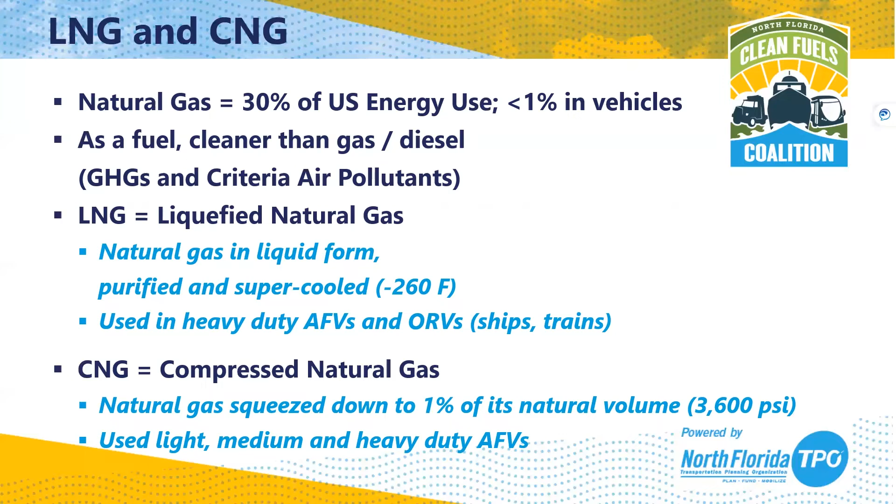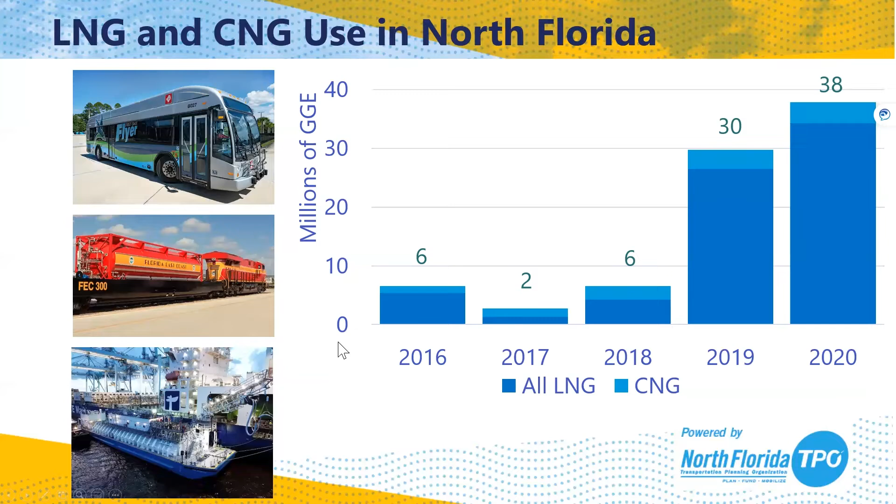Now that you have a sense of how significant the effort here in North Florida is regarding alternative fuels and what a big role natural gas plays in it, it's time to bring our experts into the conversation so you can learn about RNG and what its role might be here in North Florida and in South Florida in the future. We're going to start with Sam Lair, Manager of Sustainability and Markets Policy for the Coalition for Renewable Natural Gas. Sam is going to help us understand RNG from first principles, and then get into some of the policy questions that shape its role in the economy now and ways we can expect it to grow in importance going forward. Take it away, Sam.

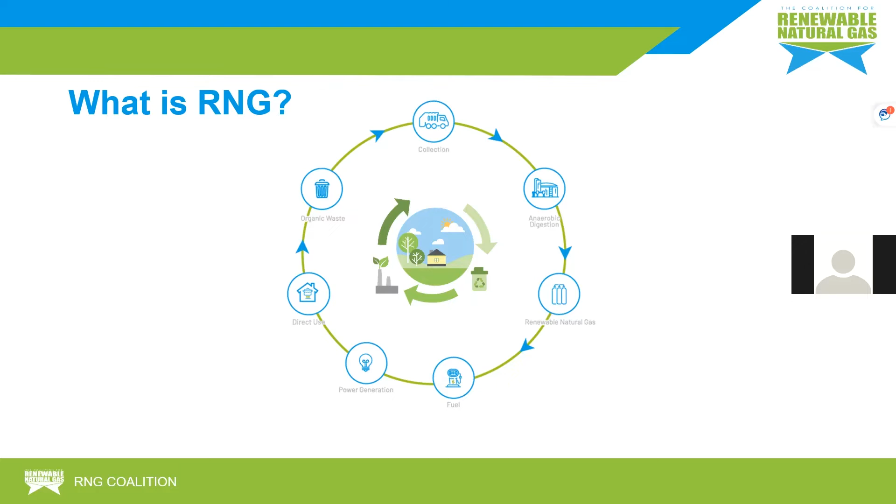One of the reasons why this is such a crucial time for our industry hinges on the need to shepherd in a new generation of waste management technologies, which from a climate standpoint will necessarily be focused on methane emissions. This year's IPCC report was very clear on this topic and included methane capture and recovery from solid waste management as an important strategy.

We've also seen explicit commitments from the UN to reduce methane, which in the US has taken the form of a methane regulation pending from EPA. That rule includes reducing leakage and venting from oil and gas operations, increasing landfill gas capture rate to 70%.

And rewarding emission reductions in the agricultural sector. So here's where we really see an opportunity for our industry to live up to its potential in abating methane emissions, a mantle we've been carrying for years.

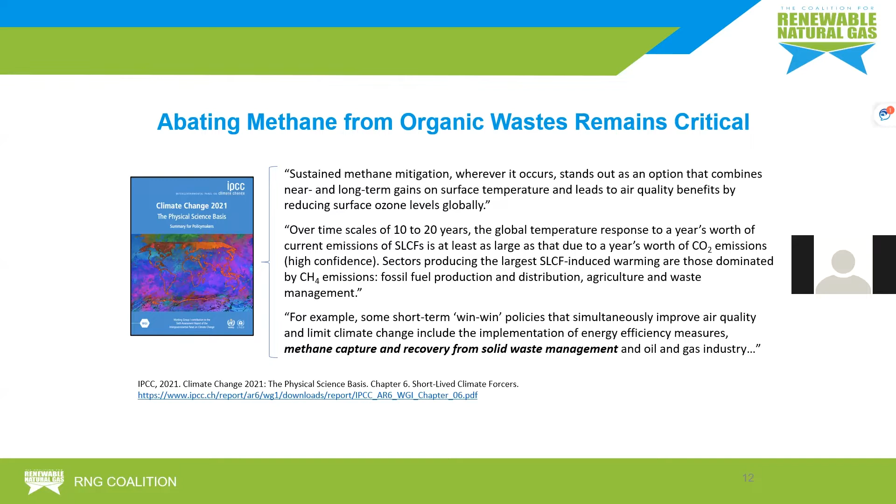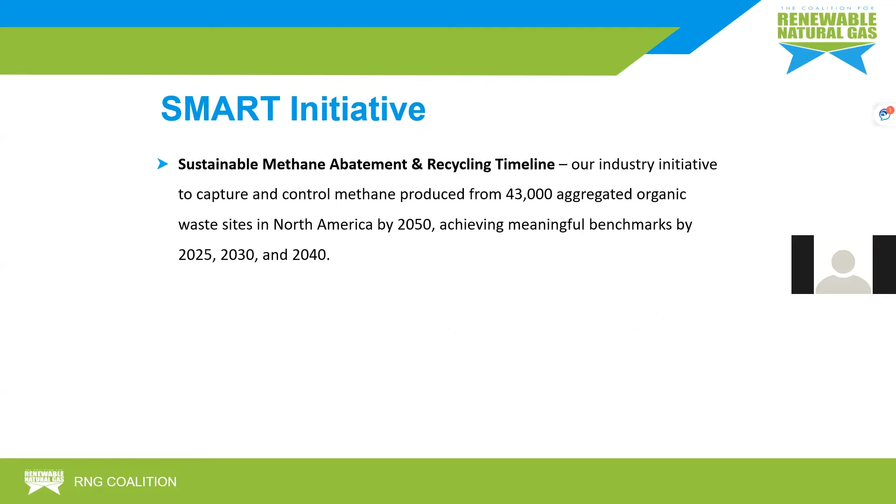Pursuant to that goal, and to the goal of realizing a sustainable profile for organic waste more broadly, including improving human health impacts and the circularization of our economy, RNG Coalition has established our Sustainable Methane Abatement and Recycling Timeline, or SMART initiative, in which we aim to capture and control the methane produced by all 43,000 aggregated organic waste sites in North America by 2050.

We're working to accomplish that with our more than 350 members throughout North America, advocating for the development and use of RNG, renewable hydrogen, and biogas to electricity produced from all sustainable feedstocks, created by all sustainable and competing technologies, and for all sustainable end-use applications.

So we really try to take a broad, technology agnostic approach to promoting RNG and the associated energy sources we can produce from that. Formed in 2011, our focus has historically been on the use of AD to produce RNG, with our work expanding to encompass those other technologies.

Broadly speaking, we know there's significant value in the use of biologically derived feedstocks across sectors. This includes the use of RNG, and increasingly electricity and renewable hydrogen, as a transportation fuel for corporate, industrial, clean energy buyers and utilities alike.

Given that bioenergy provides the only pathway to carbon negative energy, especially when dealing in methane mitigation and in tandem with carbon capture and storage technologies, which are growing, our industry presents a unique value proposition, which will allow us to really enable negative emissions in the long run.

We've seen significant interaction within the AD, the anaerobic digestion industry, between these types of partners. For example, those who are concerned with the carbon footprint of their food waste, seeking anaerobic digestion to RNG as a solution, and pairing that with energy needs in the transportation sector, which is why we're here today. That really extends to any number of feedstock, energy carrier, and end use applications you can imagine.

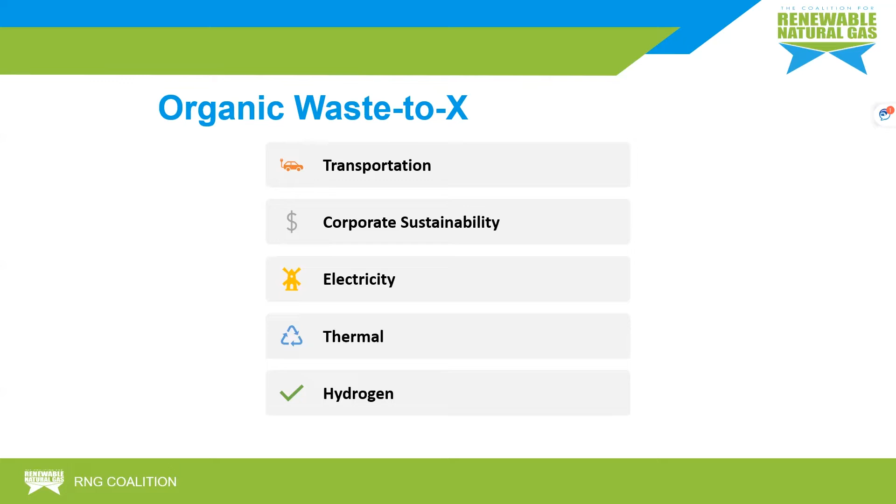For the purpose of today's meeting, we'll be focusing on the transportation sector. I think it's important to begin that conversation with a discussion of the broader environmental and human health goals in the transportation sector. Importantly, when it comes to near zero natural gas vehicles, we're able to achieve...

A 90% reduction in NOx and a 99% reduction in SOx compared to diesel with the use of a low emission, near zero emission natural gas vehicle. This is significant because, in tandem with reducing greenhouse gas emissions, criteria pollutants also have an effect on human health. So this technology means that RNG fueled NGVs have an important role to play in the transition to cleaner vehicles.

Especially in the heavy duty sector, given that zero emission technologies in these sectors, and the infrastructure needed to fuel them, are still largely unavailable.

When it comes to greenhouse gas reduction through RNG, there are two ways to assess the carbon intensity of the fuel: either on a life cycle basis or at the point of combustion. At the point of combustion, RNG is essentially carbon neutral, with the exception of the greenhouse gas effects from a small amount of criteria pollutants, which are generally rounded down to zero.

So here it's important to understand that the CO2 emitted during the combustion of RNG is carbon neutral, because it's biogenic, meaning it came from plants instead of underground, and therefore does not add additional carbon to the atmosphere. I think that's a foundational fact about biofuels, and especially RNG, since it's derived from waste. That's a good point to keep in mind when thinking about the greenhouse gas emissions from these technologies.

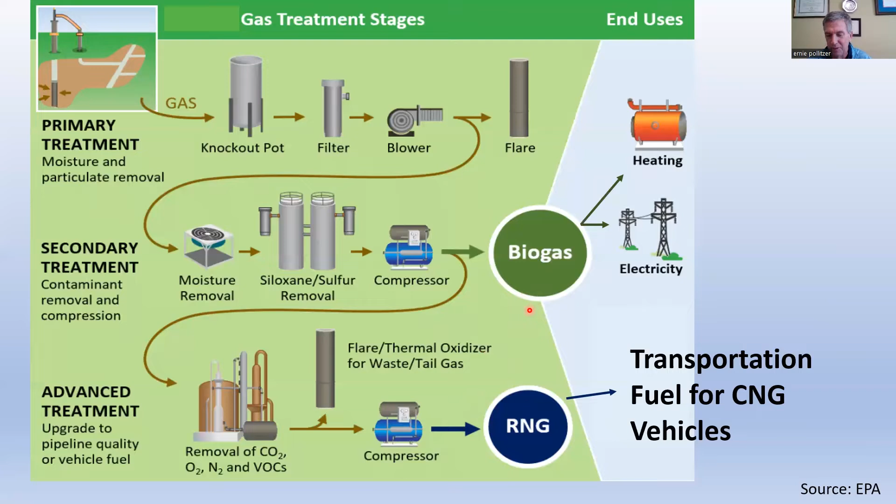Okay, so let's go through the EPA RFS program. I realize Sam talked about it, but let me go through it here. The Renewable Fuel Standard Program was passed by Congress in 2007 to produce and blend renewable fuels into the U.S. transportation fuel market. The way they do that is there's an annual renewable volume obligation, a policy that sets the volumes for the different fuel codes in the RFS program.

And the overall volume is 20.77 billion gallons of fuel, with the vast majority of that being for ethanol. In comparison, the RNG volume is only 0.77 billion gallons, so that's less than 5% of the total.

Now, the RIN that you've heard about actually is an acronym, and it stands for Renewable Identification Number. It's a unique number assigned to each gallon of RNG that's produced, and it's the environmental credit or attribute to the fuel. To give you some feel for the different values of the RINs, the RNG fuel code has the highest value RIN—it's over 2 times the value of other renewable fuel codes like biodiesel. That's one of the reasons for the interest in RNG and the growth in the industry: the higher value RIN for this fuel.

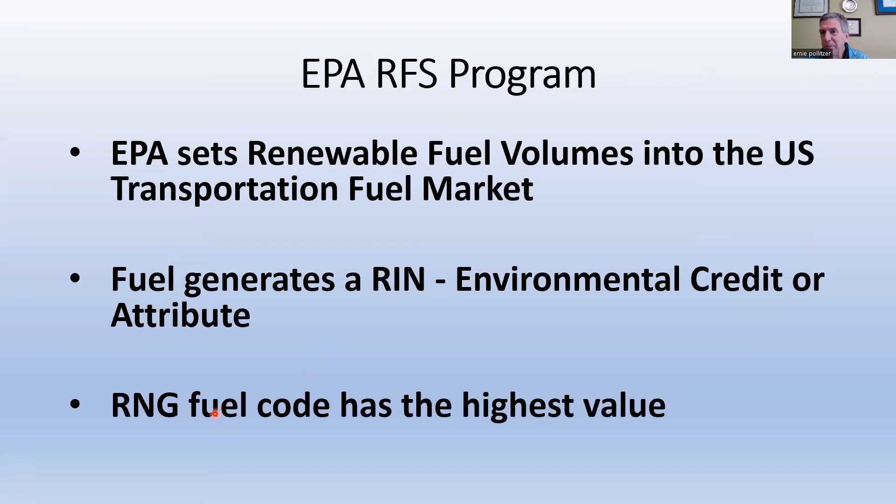So that's a quick overview of RFS. Now I'm going to go into this mapping pathway that I had in my agenda. This is the slide I'll be using for the rest of the presentation.

Now, these first 3 boxes have already been touched on with earlier slides. We kind of talked about feedstock providers like landfills, wastewater treatment plants, and agricultural farms, and they all generate this biogas from their feedstocks. Then you have the advanced gas treatment that can make the RNG fuel product.

Now at this point, there are 2 options for this fuel. You can have the RNG injected into a pipeline, or you can sell it locally. The more prevalent is the RNG pipeline injection, but not the only option. At many facilities, especially at landfills, the trash haulers have CNG trucks, and they will buy that fuel right there at the landfill and the gas treatment facility.

I've also included on this slide some information about renewable natural gas and the difference between that and regular natural gas. Renewable natural gas is 96 to 98% methane—this is the chemical formula for methane—and about 1 to 3% CO2. So you can see how this gas treatment system has taken that raw biogas, which was 35 to 40% CO2, and reduced it down to a very low amount.

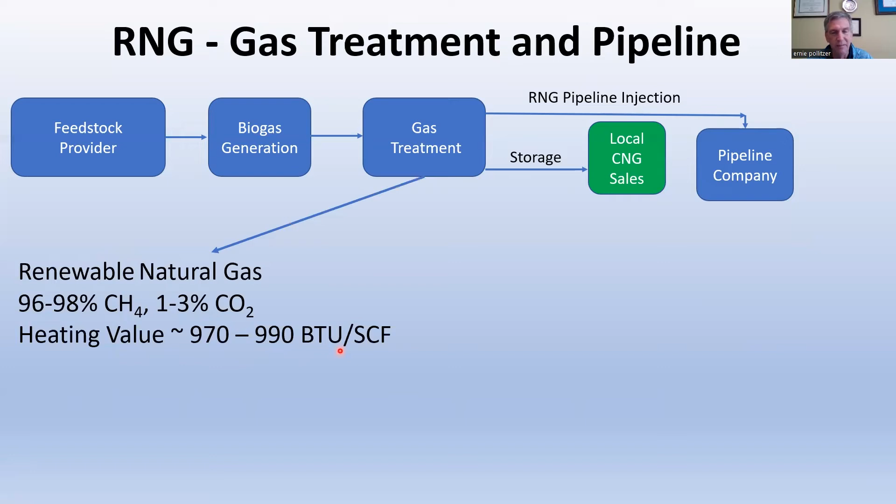The heating value is about 970 to 990 BTUs per standard cubic foot. Compare that to regular pipeline natural gas, which is typically 85 to 90% methane, less than 1% CO2, but the heating value is over 1,000. So if anybody's curious about how pipeline natural gas can have a lower methane content but a higher heating value, feel free to ask your question in the chat.

Now, looking at these two gases, you may not think there are big differences between them, but for the pipeline companies, these are big differences, and they are very strict on the gas quality for renewable natural gas. They have analyzers on these pipelines connecting into them, analyzing for parameters like methane and CO2, along with others like nitrogen, oxygen, water, and hydrogen sulfide. They are very strict on the quality of the renewable natural gas that goes into their pipeline.

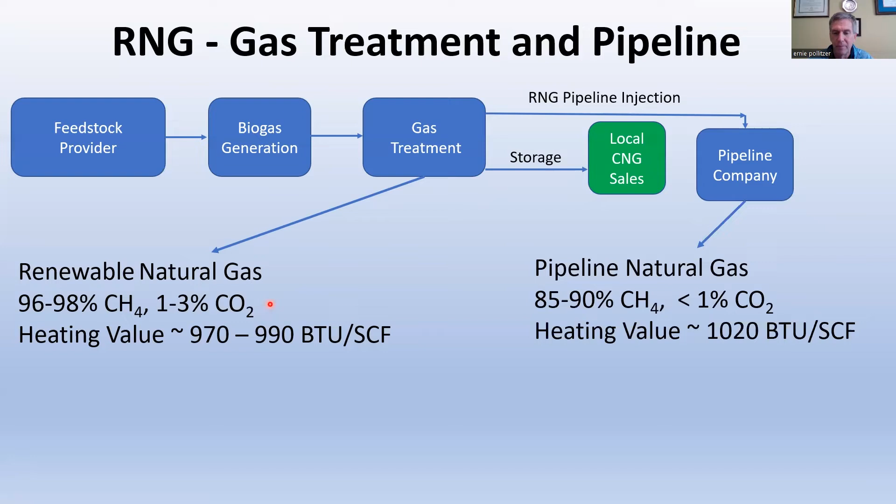So we'll move on to this next slide, which shows the next steps of the contractual selling of the renewable natural gas to CNG end users down here. Again, it could be either this local CNG sales or the CNG user down here. Now, one of the reasons pipeline injection is more prevalent is because of what's called equivalency.

That is because RNG can be injected into the pipeline at one point right near the gas treatment facility, and then an equivalent volume is sold from another pipeline anywhere in the US. So that makes a big difference. This allows the RNG buyers to be buying gas from anywhere in the US.

What's not shown on this slide is the additional environmental credit associated with RNG if this RNG is sold into California, Oregon, and soon Washington. While it's not shown, these state programs have a big impact on the overall RNG market.

So when you're buying RNG from a pipeline, what you're really buying is this RIN credit here, the environmental attribute associated with the fuel. You're not actually buying the RNG fuel itself.

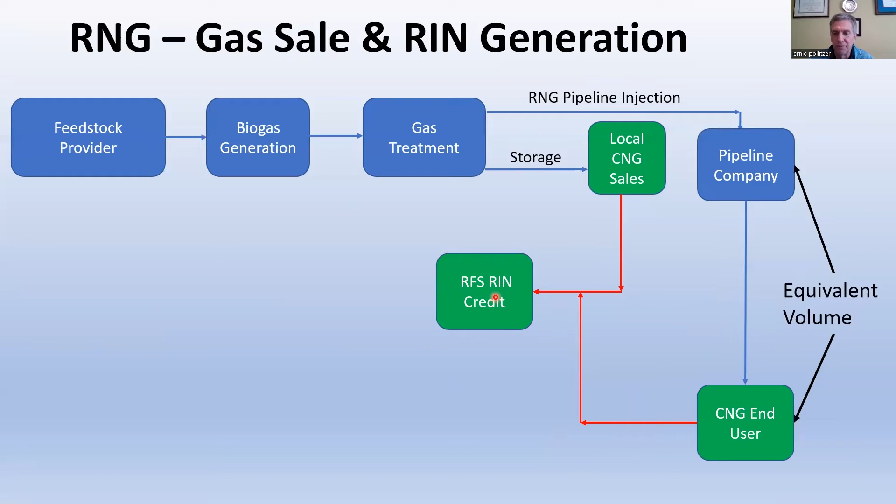Now, this next slide shows the pricing for the RIN along with the value of the actual fuel itself. Down here, this shows the price of the fuel, about $4 per million BTU. I don't know if that's the kind of pricing you guys are seeing. That's based on current Henry Hub natural gas pricing.

Now, for the RIN, under the EPA's RFS formula, you get 11.73 RINs per million BTU of gas. Currently, the RIN is selling for $3.40 per RIN based on current RIN spot market pricing. So you combine these two together, the RIN pricing along with the fuel itself, and you get a total of nearly over $40 per million BTU.

This shows the value of this RIN, that it's nearly 10 times the value of the fuel itself. Without this EPA RIN and without the other state programs, these RNG facilities would not exist. There's just no economics for them without these environmental credits.

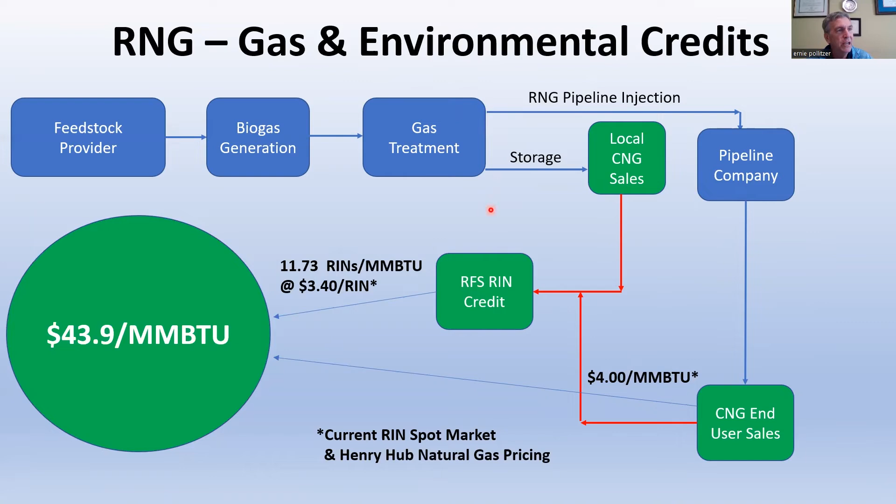Okay, so let's move on to the last slide here, which shows the major stakeholders for an RNG project. Now, from the perspective of many of you, there probably should be a fourth stakeholder, and that's the actual CNG users. But as you'll see here, I kind of lumped them together with others.

So the major stakeholders for an RNG project are, first off, the owner of the feedstock - the landfill operator, the wastewater plant operator, et cetera. They're the ones that own the feedstock. They're the ones generating the biogas.

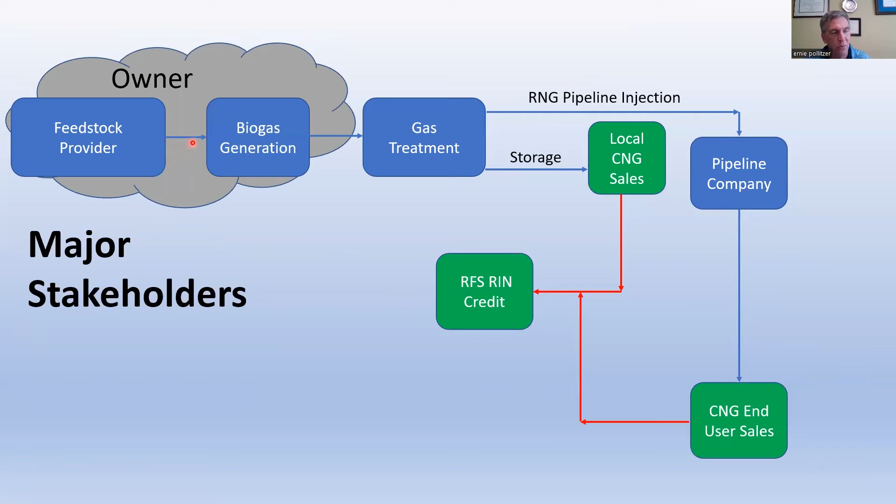Then you have what I call the project developer. This can be a contracting company or engineering company that will come in and contract with the owner to build out the gas treatment plant, potentially even build the biogas vessels, the digesters, if they're not already there. So the developer will build all this equipment - the digesters, the gas treatment plant. They'll connect the RNG to the pipeline or build out the storage and local CNG dispensers.

And then what happens is the project developer will build these plants, and many of them will continue to operate the plants once they're going. And then they'll contract with the final major stakeholder, and that's the gas marketer.

And the gas marketer is a company that handles connecting the RNG sales with the CNG end user, generating the RIN credits, cashing out those credits, and retiring that RIN. They basically handle all the transactional work associated with the RNG material, the RNG gas. So if you want to buy RNG, you will need to connect with a gas marketing company.

Now, based on the last slide, some of you might think you have to pay $40+ per million BTU to get that fuel, but that's not the case. As stated, most of the value of RNG is with the RIN itself, and that's paid for by what's called the obligated parties in the RFS program. If you're curious about who these obligated parties are, feel free to ask in the chat.